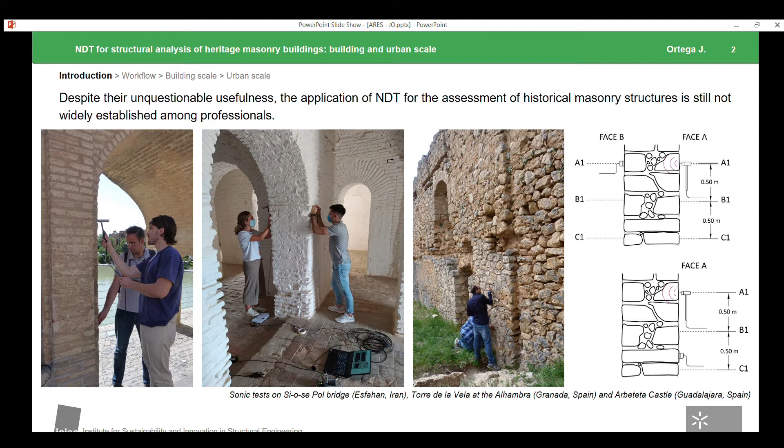And despite we can see a lot of works dealing with non-destructive techniques in the literature, in academic works, I believe their use is still not widespread among professionals. So we believe there is a necessity to create awareness about the usefulness and the great value that these techniques have when dealing with heritage structures, because in the end, this is the only way we can obtain and extract information from the structure without doing any damage to it.

For example, in this case, if we use georadar or GPR investigations, we can detect hidden information about the geometry or the construction of a monument. Or,

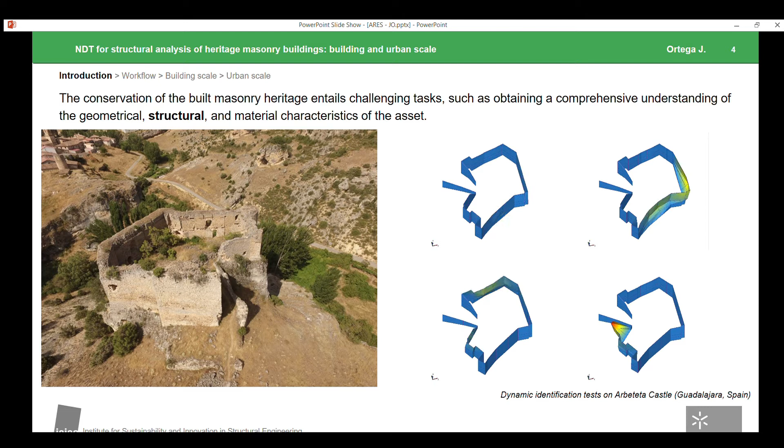for example, through dynamic identification test, we can have an initial understanding of the structural behavior of a building. Or as some of you already highlighted during this workshop, if we use flat jack or another kind of techniques, we can even get an approximation of an estimation of the material properties of the structure.

We know that flat jack is not really non-destructive, but the damage we do to the structure is really minor, and it's easily repairable. Moreover, there is another technique, as we can see later, like the sonic testing that we can also extract information from, and that one is completely non-destructive.

So the idea of this presentation is to show the common workflow that we used at the University of Minho. It's the workflow that we show to students in our masters. It's also the workflow that we do for the consultancy works that we do, and I will show you this workflow with some case studies that we have done in the past.

First of all, one thing that I think is important to highlight is that non-destructive techniques are always a complementary tool. So even though they can have value on their own, we should always do them alongside another set of tasks that will help us understand much better the results that we obtain with them. So in this particular case, as an illustration of what I mean,

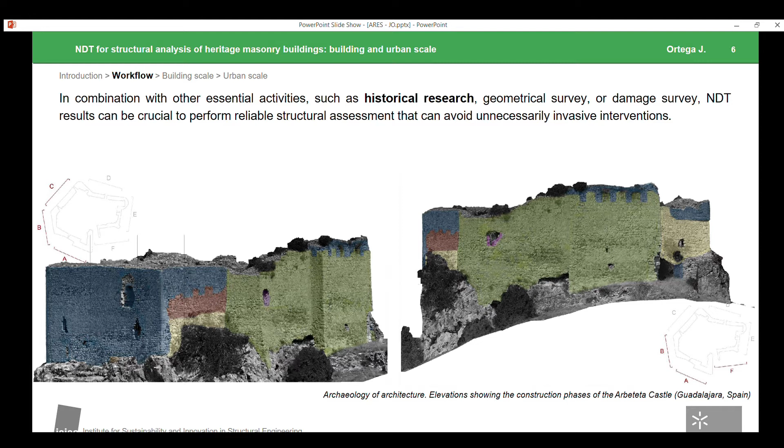before doing any non-destructive testing, we had available these detailed archaeological studies that allowed us to distinguish the different construction phases of the building, and even to determine some possible construction joints, because these parts of the walls were constructed at different eras.

At the end, these joints were structural, and when we did the dynamic identification test, we could figure out that these joints had an important influence on the structural behavior of this castle. Then when we prepared the numerical model and performed a modal analysis, we had to take into account these joints to simulate the real behavior properly.

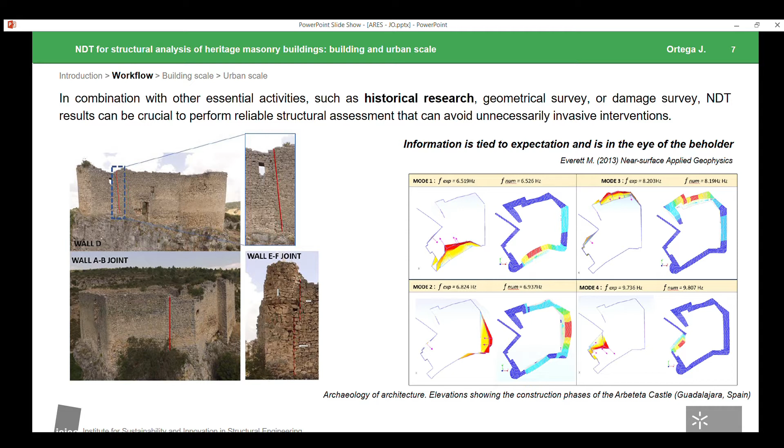If we didn't have these previous archaeological studies, this behavior would be much more difficult to replicate. And at the end, what we have is a numerical model that we know might represent the real behavior of the structure in a more reliable way.

Besides historical research, we also try to always perform detailed geometrical studies using photogrammetry, laser scan, or any other techniques that are available. In this case, for example, this is in the sanctuary of Santa Luzia in Portugal.

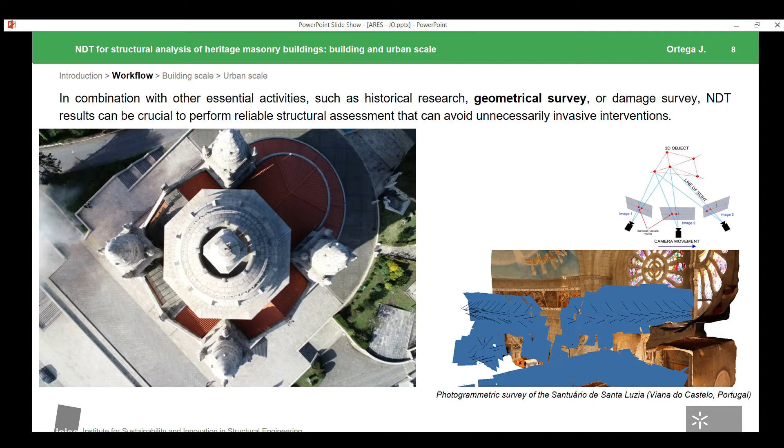So we also perform photogrammetry, an external photogrammetry using drone, and internal photogrammetry using our cameras. And at the end, what we get is a new set of plans and a detailed 3D model of the structure that gave us very important information,

either to create our 3D models, or we also get information that is more difficult to obtain, like accurate thickness of the different elements, and other very useful information that we need to obtain before we carry out any kind of structural analysis.

But anyway, as I was trying to explain before, this information can always be enhanced if we use some of the non-destructive techniques available. So, for example, when we did the photogrammetry, in the case of this dome, we only had information from the interior, so we could not know the thickness of this dome. So we can use other techniques that provide us this information, such as GPR.

In this case, it proved to be particularly useful because, in spite of what we were thinking, that it would be a stone masonry dome like the rest of the building, it was actually a very thin shell of less than 10 centimeters, and it was reinforced. So we found out that this dome was made of reinforced concrete.

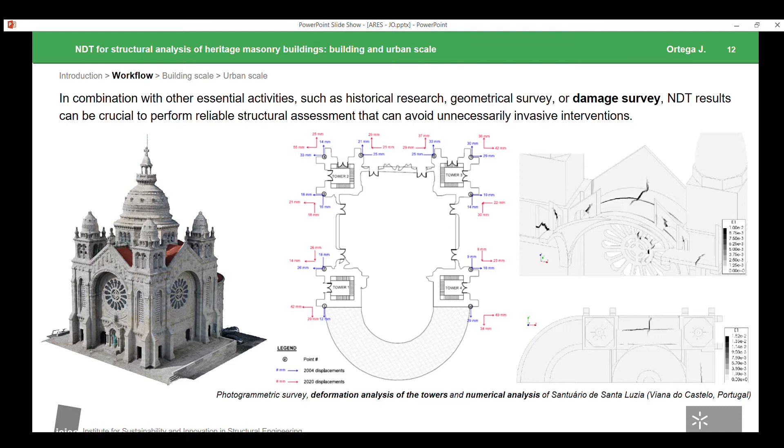I guess all these techniques fit each other. Ultimately, what we obtain is an accurate 3D model on which we can perform any kind of operation and analysis, such as studying the deformations of the towers, which was important for us, or performing a structural analysis, always knowing that what we are doing is reliable and represents well the real structure. This is, in essence, the essential workflow we try to follow in our work when we aim to do advanced structural analysis of heritage buildings.

We always try to do sonic tests, because this is a fast and direct tool to have a first estimation of the material properties, and it's completely non-destructive. We also try to always do a dynamic identification test to obtain a first estimation of the modes of vibration of the building, so we can calibrate our numerical models. These previous works really strengthen the confidence we have in our final numerical model, along with the historical survey, the detailed geometrical surveys, GPR, Impact Echo, or any other technique available.

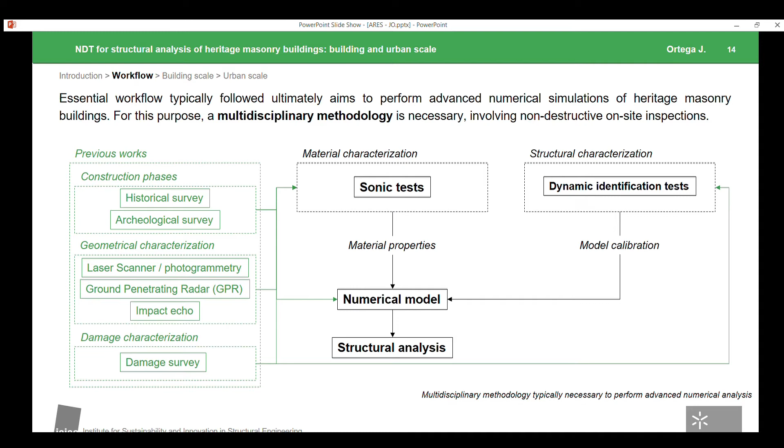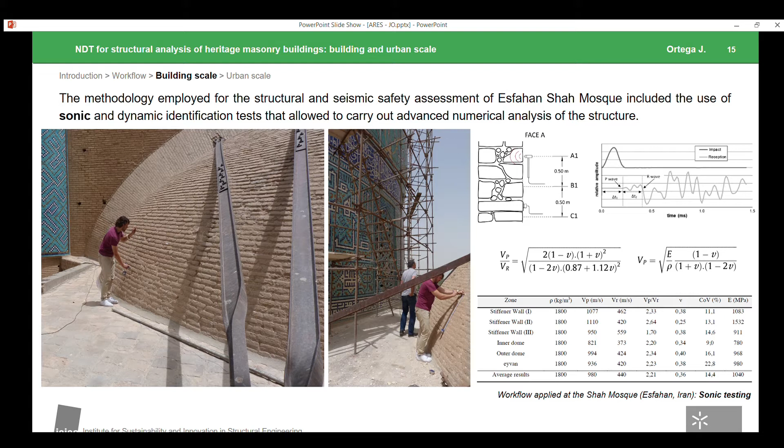First we did some sonic tests on all the structural elements, such as the domes and the walls of the mosque. For those of you not familiar, the physical principle of the test is that the velocity of the waves propagating through a material is directly correlated with the elastic material properties, such as the Young's modulus. So what we do is generate a wave, measure its traveling time, compute the velocity of the wave, and use it to estimate the Young's modulus. This gives us a first estimation of the Young's modulus of the brick masonry used in this structure.

Then we do the dynamic identification test. We put accelerometers in places where we believe they will be excited by ambient vibration, and then we can obtain the natural modes of the structure. Once we have this information, we can prepare our numerical model.

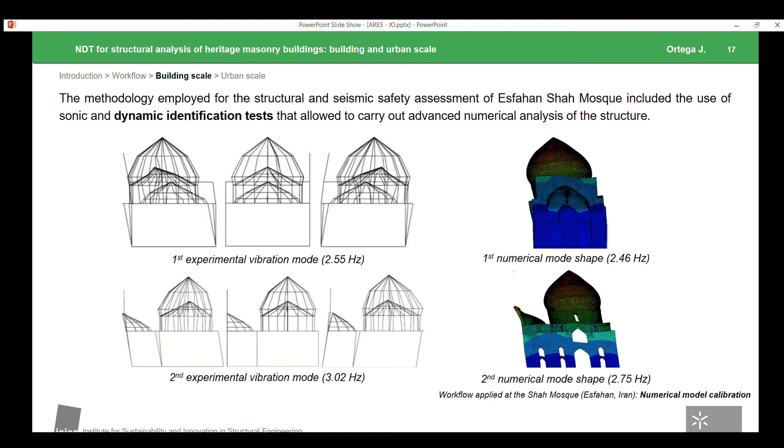The first input is the material properties obtained through the sonic test, and then we perform a modal analysis and try to compare if our numerical mode shapes correlate well with the experimental ones. If not, we do a calibration process, slightly updating the material properties and varying the boundary conditions until we obtain a good calibration. Then we can be more or less certain that our model simulates the real structure well, so we can proceed with the structural analysis.

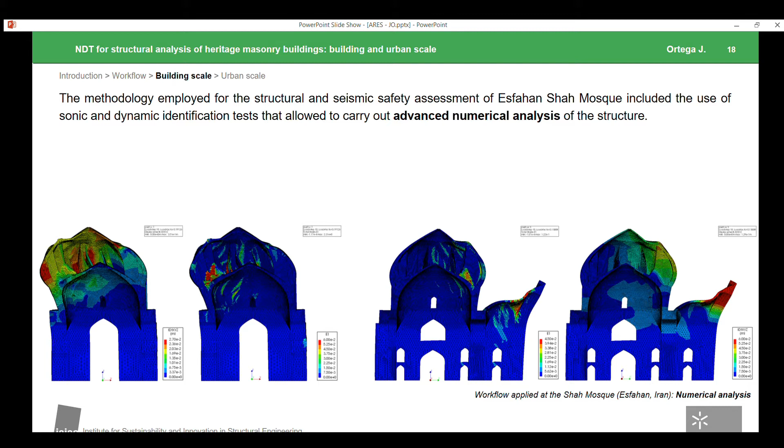Finally, I'd like to talk about how we can also use non-destructive testing at a different scale, for example when doing a large-scale seismic vulnerability assessment of an old historical city center. We believe non-destructive testing can be very helpful here too, especially when dealing with a typology that is recurrent, where we can find many examples of a similar typology within a given area.

So then we can perform this non-destructive testing, and essentially what we do is try to develop a probabilistic methodology that allows us to analytically derive seismic fragility functions that include uncertainty regarding different parameters, such as the material mechanical properties.

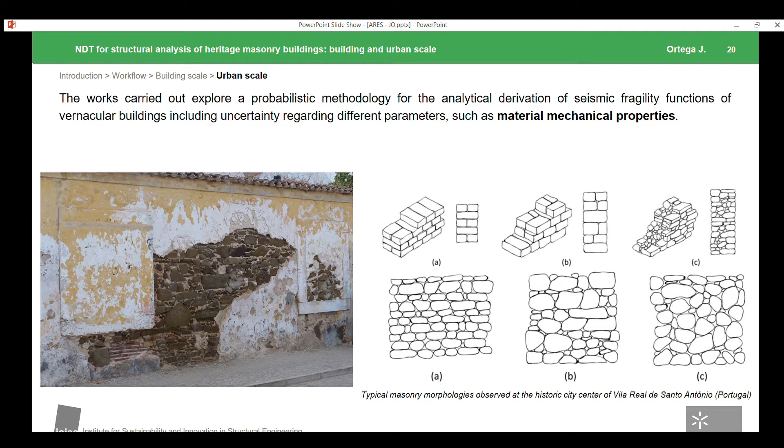When we try to do these probabilistic methodologies, what we need to define is a probabilistic distribution of the parameters selected. For example, if we want to study material properties, we need to find the most adequate probabilistic distribution. There are some codes, such as this Italian guide, that give us a prior probabilistic distribution for the different material parameters according to the masonry typology.

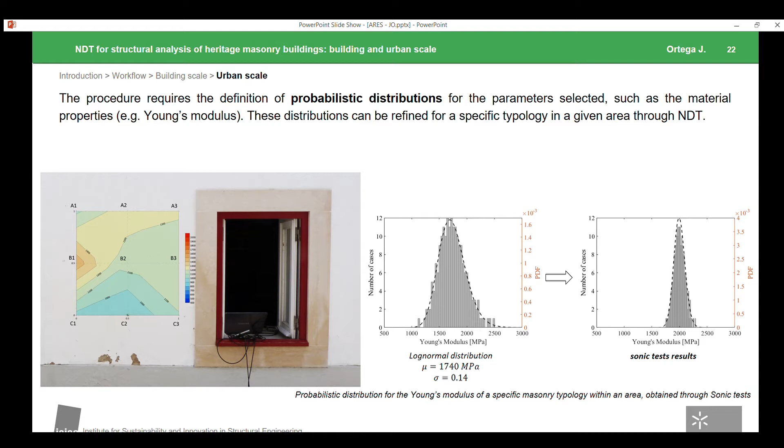But if we are able to perform some non-destructive testing, for example, that provides an estimation of the Young's modulus, and we perform it in several cases within a city center of the same typology, then maybe we can obtain a much more specific probabilistic distribution that better represents the masonry typology of that specific area.

Once we have this probabilistic distribution that represents well the masonry of the area we are studying, we can perform numerical finite element analysis to evaluate the seismic capacity of buildings according to the variation of different selected parameters, such as material properties or other construction parameters, for example the lack or presence of a diaphragm.

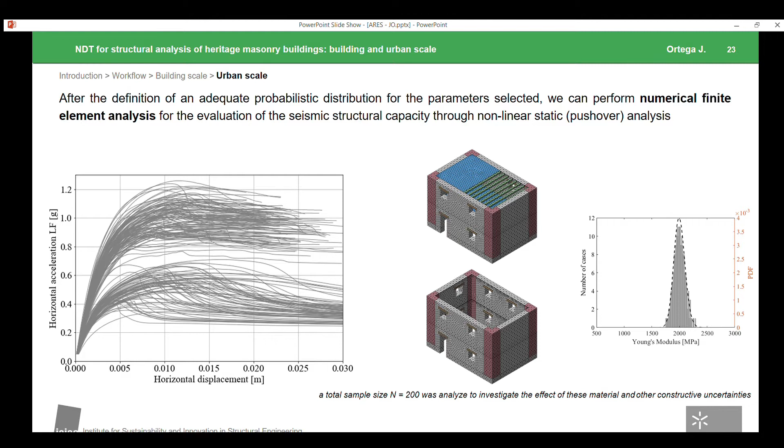As a result, we can construct fragility curves for a given construction typology that take into account the uncertainty of these material and constructive parameters, which were refined and investigated with the use of non-destructive tests.

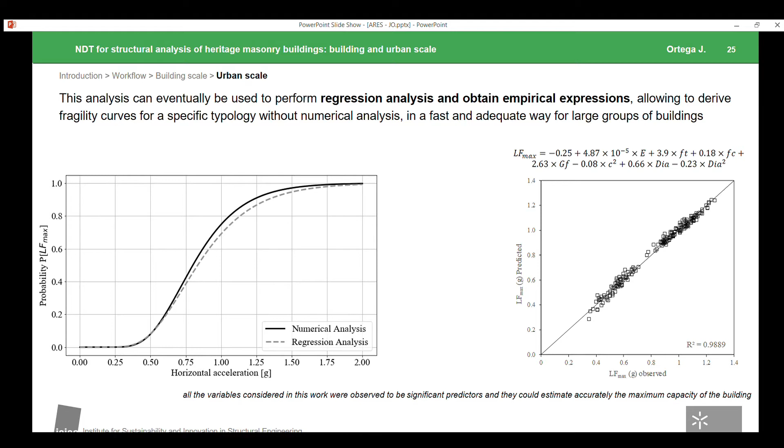Eventually, with this kind of approach we can perform regression analysis and obtain empirical expressions which allow us to derive these fragility curves for a given typology without numerical analysis. This is an easy and fast way to do it for large groups of buildings, since numerical analysis is a more demanding and time-consuming tool.

But well, this is more or less what I wanted to discuss. I hope I could give a quick glimpse of how we use non-destructive techniques in our group at the university, and show how vital and fundamental they are for all our work. So thank you for your attention.

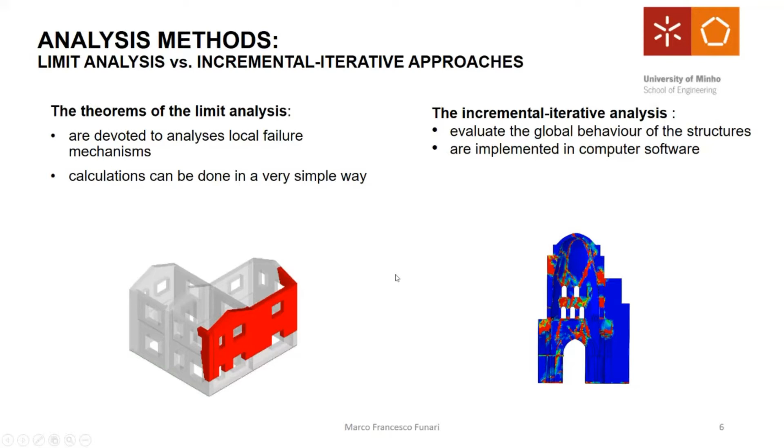But the question now is, what do we have to use? The choice, to be honest, depends on several factors, like the cost, the time, and also the knowledge level that we have about the investigated structure. We also have to say that neglecting the global behavior and focusing just on the local failure mechanism could bring erroneous evaluation of the seismic performance of the structure.

To this end, I developed this kind of two-step analysis. As you can see, it is based on two main phases. We have the blue blocks, which aim to assess the global behavior of the structure by performing just a pushover analysis. Then we have the orange box, which is all integrated in a visual programming environment, in particular in Grasshopper for Rhino 3D, which aims to perform local analysis by combining both the theorem of plasticity, in particular the upper bound theorem of plasticity, and an evolutionary solver. In particular, I used genetic algorithm.

As you can see, the link between these two phases is the construction of this kind of control surface, which allows us to coarsely identify the macro block geometry that is going to collapse for that loading condition.

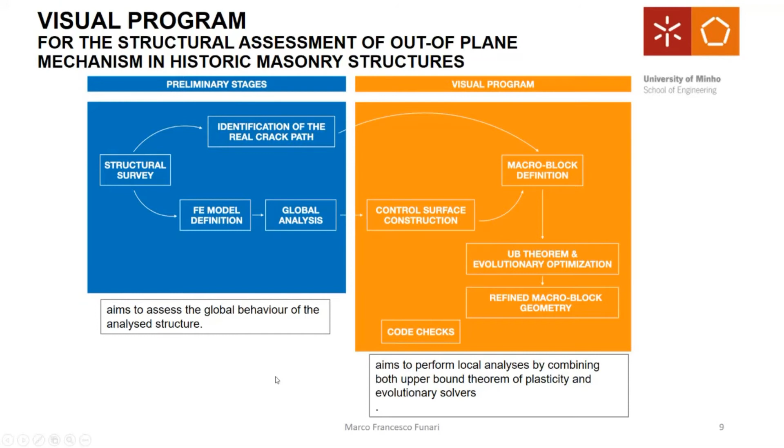What is the control surface? As you know, the pushover method is very sensitive to the choice of the control point. To overcome this problem, I consider several control points on the top of the structure, as you can see in this picture. The control surface is generated by interpolating a surface through the point cloud.

The point cloud has as x and y coordinates the same coordinates of the control points, whereas the z coordinate is directly proportional to the horizontal displacement occurred during the step-by-step global analysis.

This just means that when we have zero horizontal force and of course also zero horizontal displacement, the control surface is basically flat. Whereas in this picture, I'm reporting a control surface where the structure is very close to the collapse time.

I hope it's quite intuitive that the regions of the control surface which present a higher value in terms of slope are those in which the plasticity is concentrated. So the control surface allows the script to identify the weak region of the structure and then to introduce the failure surfaces in order to start the local analysis of the failure mechanism.

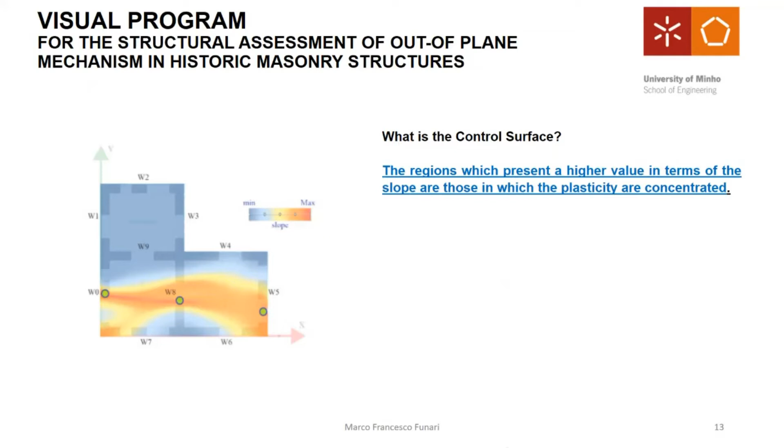About the second part of the proposed procedure, it is all integrated in Grasshopper for Rhino. It is clustered, as you can see, into several groups, which are tasked to perform specific operations.

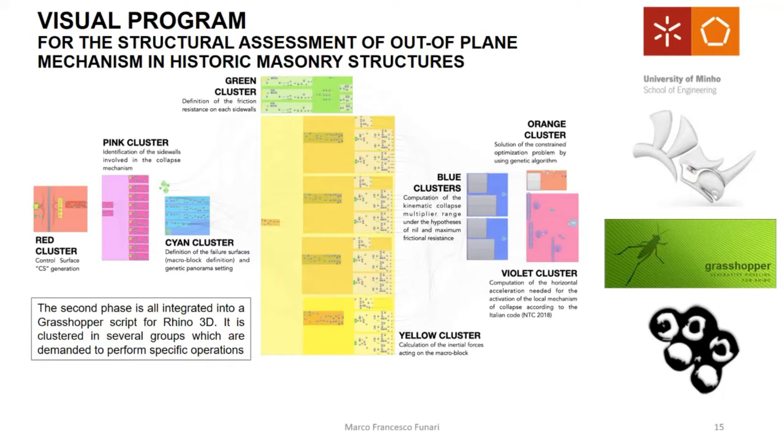Let's start. The first group is the red cluster, which is tasked with defining the control surface generation, just by using the data arising from the global pushover analysis.

Then we have the second cluster, which aims to identify the sidewalls involved in the collapse mechanism. Then we have to define the failure surfaces, which generate the definition of the macro blocks.

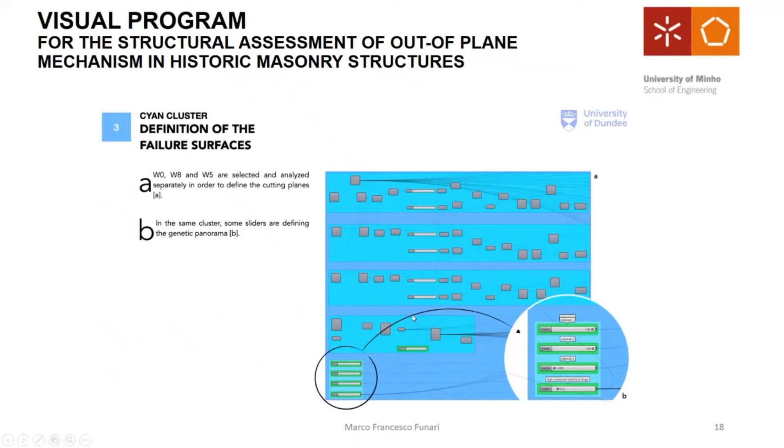As you can see in this cluster, we have some sliders which are able to define the genetic panorama, and they represent the variables of our optimization problem that will be performed with the genetic algorithm. Then we have the fourth cluster, which allows us to define the frictional resistance of the sidewalls.

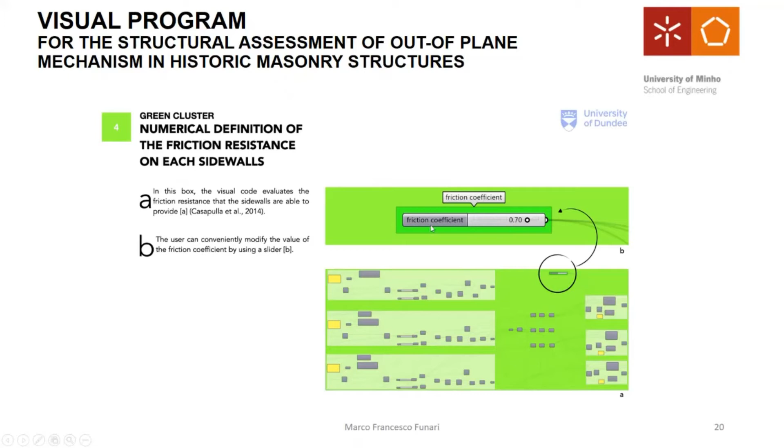As you can see in this framework, the user can also change the friction coefficient and other parameters for the optimization problem. The yellow cluster is devoted to computing the inertial forces, which are very important in order to define the equation of the principle of virtual works that allows us to compute the kinematic collapse multiplier.

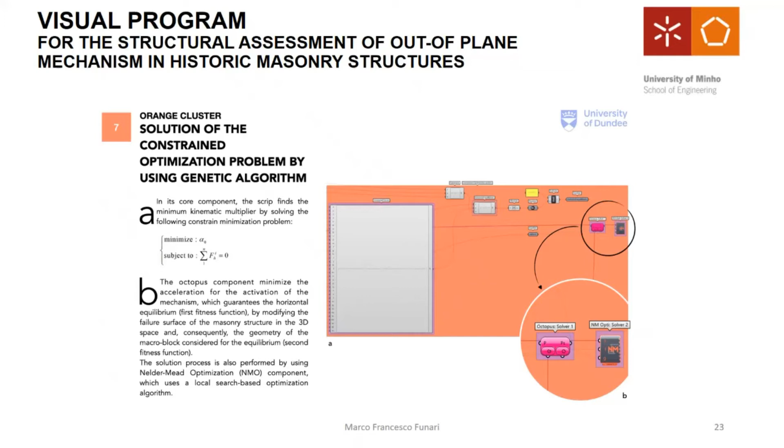This orange box is the box tasked with optimizing the problem to find the minimum load multiplier and to find, of course, also the horizontal acceleration needed for the activation of the local mechanism.

Based on the result arising from this global analysis, we can construct the control surface, which allows us to define the macro block geometry. And then, thanks to the genetic algorithm, we can optimize to minimize the value of the load multiplier and find the minimum load multiplier according to the upper bound limit theorem.

Since a couple of months, I'm also working in collaboration with Dr. Mehrotra from University of Minho, my same university. We are trying to implement my method of analysis with her tools for rocking dynamic analysis. Basically, starting from the geometry and also from some mechanical data, this script is able to define the geometry of the macro blocks using the procedure I described before. The second part of the script is able to compute the kinematic constants, write the equation of motion, and provide a representative time history of the structure.

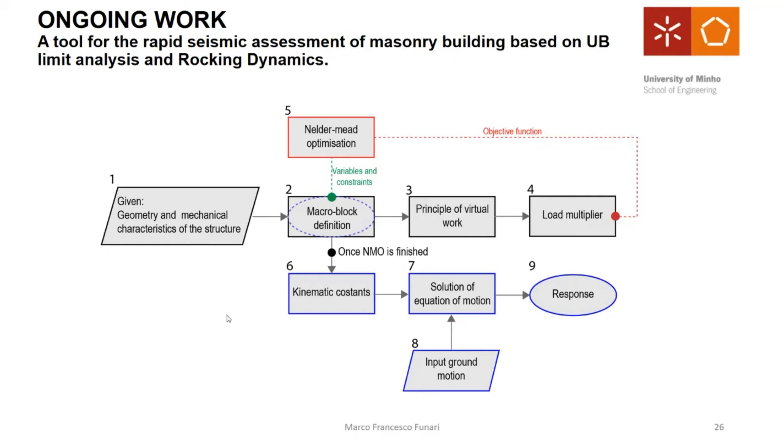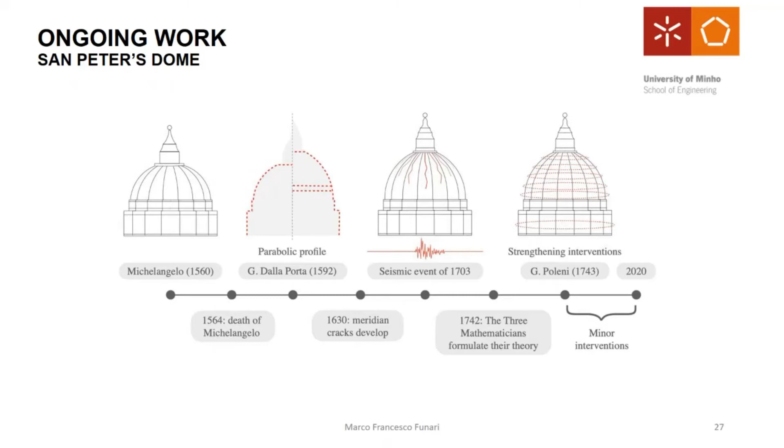Another ongoing work is the definition of a grasshopper script for the computation of the horizontal thrust of masonry domes. This work is in collaboration with Dr. Luis Carlos Silva, Professor Paulo Lourenço, Daniel Oliveira, and Lamu Musavian from the University of Naples. To do that, we chose to investigate one of the most critical cupolas in the world, the St. Peter's dome, designed by Michelangelo and Giacomo della Porta. Masonry domes tend to generate meridian cracks, so the structural behavior of this kind of historical dome is that of a pushing dome, so we can study just a slice of the cupola.

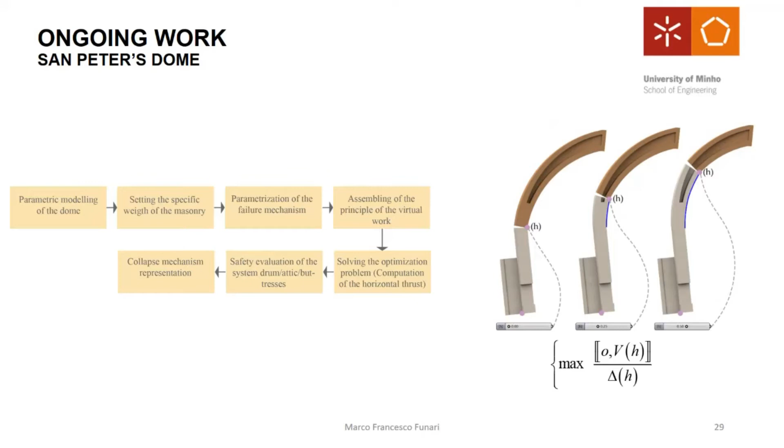In this slide, I'm representing the flowchart of the proposed script. First, we can parametrically model the geometry of the dome. Then we set the specific weight in order to compute the inertial force. Then we define the parametrization of the failure mechanism, introducing, according to the upper bound limit analysis, a cylindrical hinge which generates the collapse of the structure. Then we can assemble the principle of virtual works and solve it with an optimization tool. In this case, I used Octopus, which is based on genetic algorithms.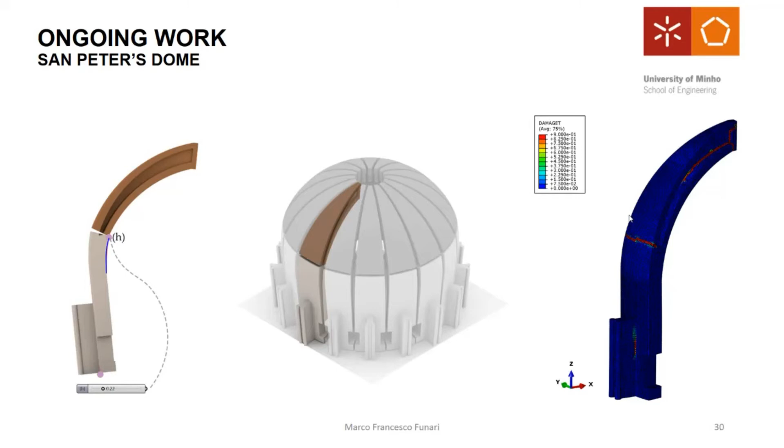This is one of the preliminary results of this procedure. We are also trying to validate it with finite element analysis using a concrete damaged plasticity model available in Abaqus. The results obtained using the grasshopper tool, which defines the horizontal thrust and failure mechanism in no time, just 5 seconds, are in perfect agreement with the results obtained in terms of damage pattern from the finite element analysis.

Some conclusions: I explained this novel digital procedure for the assessment of masonry structures. Genetic algorithms are employed to explore different kinds of collapse mechanisms, and we are also trying to apply this approach to different structural typologies, like domes. The proposed visual script has been developed using grasshopper components, but we are working to develop a single component program in C#, to make this procedure as user-friendly as possible. Our idea is also to share these components freely with other scholars and students, because I don't think our research makes sense if we cannot share it freely with other people.

Thank you very much, Mislav. Thank you very much for this nice opportunity. Marco, thank you very much for your very interesting presentation. I'm really satisfied with the things you're doing and presenting, and I hope you will continue in this good direction and present new results very soon. Thank you once again for the really nice presentation.

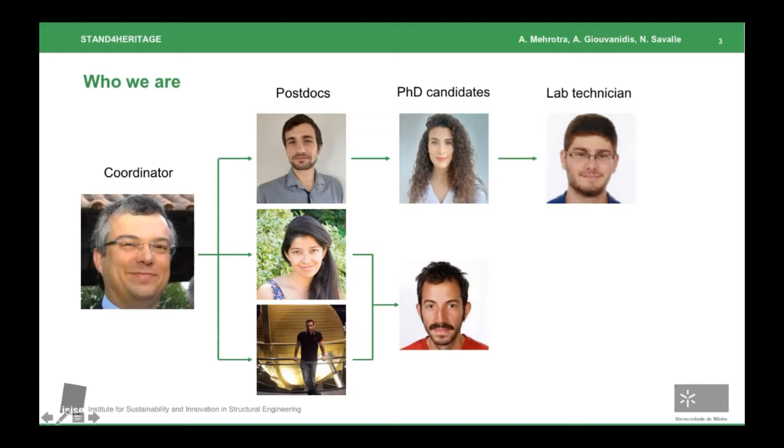Through STAND4HERITAGE, we are all working towards introducing formal standards for safeguarding built cultural heritage. Heritage buildings are intrinsically very diverse and complex, and are often subjected to earthquake-related threats such as out-of-plane damage to masonry walls, which is acknowledged as the main cause for loss of artistic assets and injuries to people both inside and outside buildings.

But first, what is masonry? As you can see, it's a composite material typically made up of bricks, stones, or adobe, and it can either be mortared or dry stacked. It is a very old material, represented almost everywhere, and makes up a substantial part of our built cultural heritage.

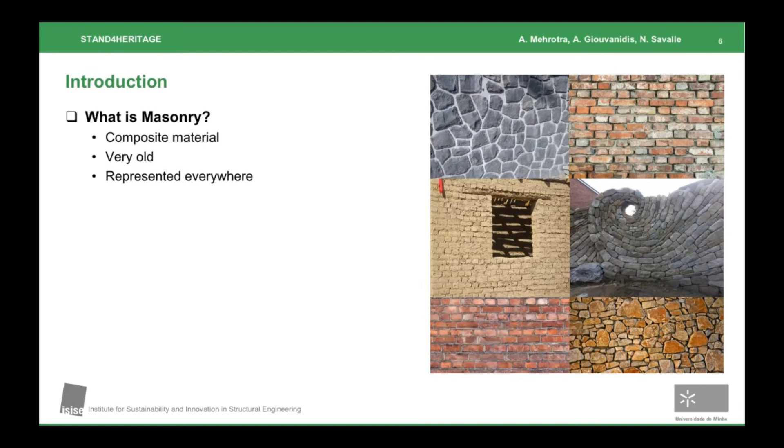Conservation of this cultural heritage is both part of our societal legacy as well as an important economic issue. In fact, in Europe alone, tourism to visit the many monuments and historical centers accounts for 10% of GDP and 12% of employment.

Additionally, masonry represents 50% of the world building stock, and often older masonry structures need maintenance due to cracking, spalling, weathering, settlements, or other causes of damage.

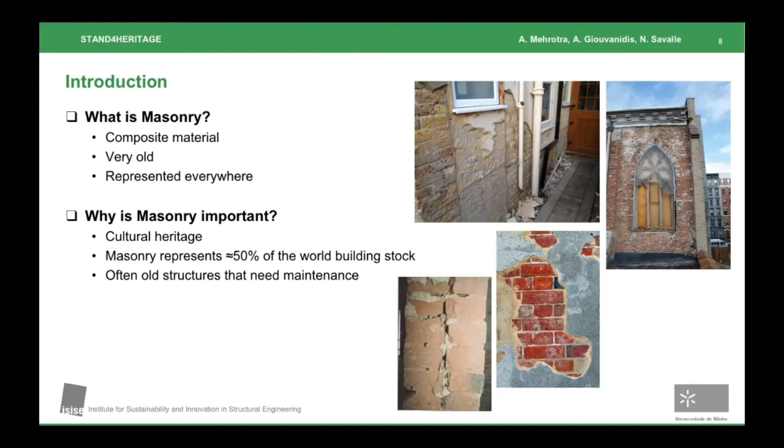Furthermore, masonry structures have traditionally only been designed for gravity loads. However, during earthquakes, brittle out-of-plane failure of masonry walls is a very commonly observed phenomenon. This is particularly relevant and necessary to address in several earthquake-prone countries in Europe, such as Italy, Croatia, Greece, Turkey, and Romania.

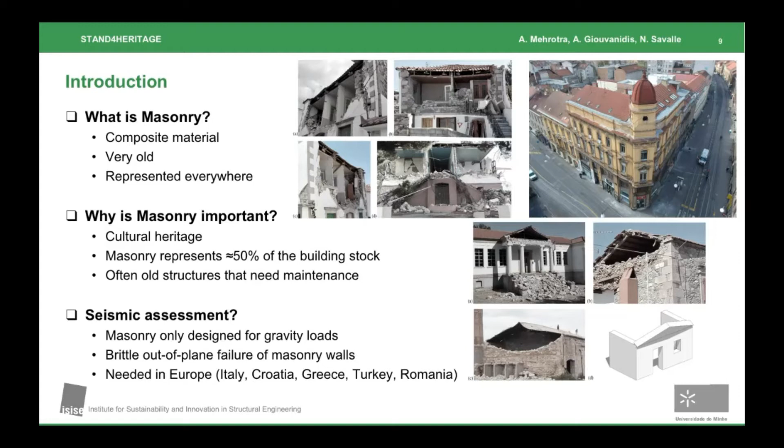There is thus a need to control out-of-plane displacements of masonry walls, the assessment of which is done using either simplified pushover analyses or more advanced numerical modeling simulations.

However, this involves several challenges, as demonstrated by a recent blind prediction exercise whereby several international experts were invited to predict the seismic capacity of two U-shaped masonry specimens that were tested on a shaking table. The specimens comprised a more regularly arranged brick house and a more irregular stone house. 18 predictions were provided by the experts using different modeling approaches, and an enormous scatter was observed in the results, with a very strong deviation from the experimental response.

This scatter was linked in part to the numerical parameters assumed for these simulations, which was found to strongly influence the predictions. There is thus a need for integrated stochastic-based seismic modeling of these structures to better account for these uncertainties. STAND4HERITAGE addresses this need through 4 interwoven work packages.

The first work package focuses on the characterization of the seismic signal, with the objective of identifying the ground motion characteristics most critical to the out-of-plane behavior of masonry walls. Specifically, given the shortage of real or historic earthquakes that exist, this work package uses stochastic analysis to create a huge database of seismic signals and to investigate their influence on out-of-plane behavior.

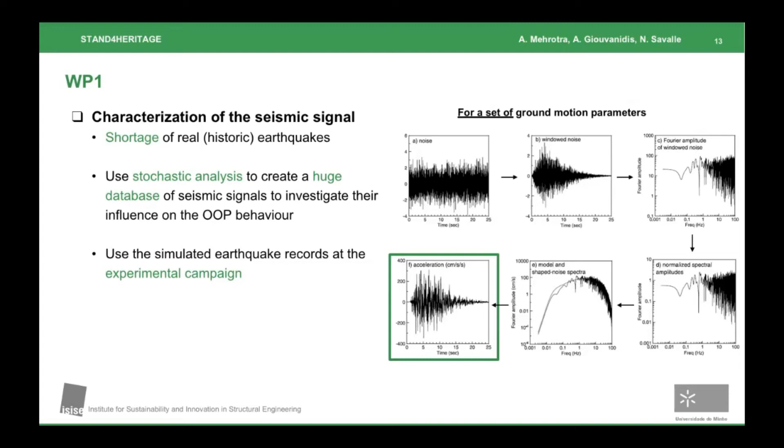These simulated earthquake records will then be used in an extensive experimental campaign, which brings us to our second work package, whereby tests will be conducted on rocking blocks, rocking masonry walls representative of facades, and U-shaped masonry wall assemblies. Specifically, tilting tests will be conducted to identify failure mechanisms, while varying parameters such as geometry, material properties, the presence and location of openings, as well as the quality of the connections to the transverse walls.

Additionally, an extensive number of shake table tests will also be conducted to study the effect of the seismic input. The specimens to be tested include single and multiple rocking blocks, as well as U-shaped masonry walls. Furthermore, a 6-camera digital image correlation, or DIC, system will be used to monitor the displacements of these structures.

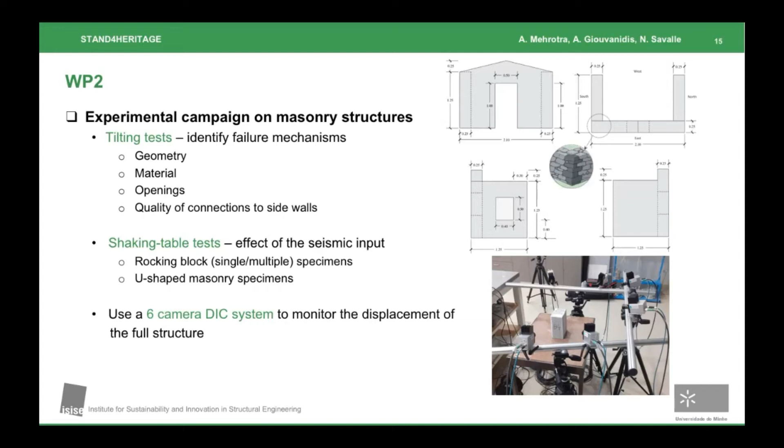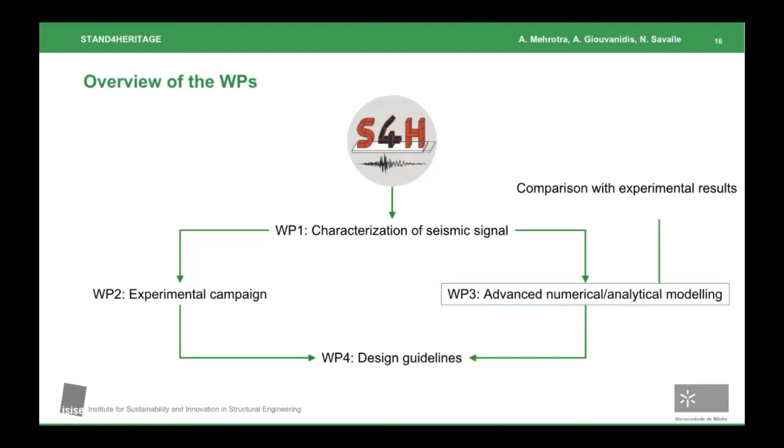In parallel, the third work package is devoted to advanced numerical and analytical modeling, with the results of these simulations being compared with the experimental tests. More specifically, rocking dynamics is used in MATLAB to formulate new analytical models to simulate the behavior of more complex masonry structures. Simultaneously, numerical finite element and discrete element models are being developed in both Abaqus and 3DEC to better account for energy dissipation of the rocking structures at impact and to accurately reproduce the whole response history and model mechanism evolution over time.

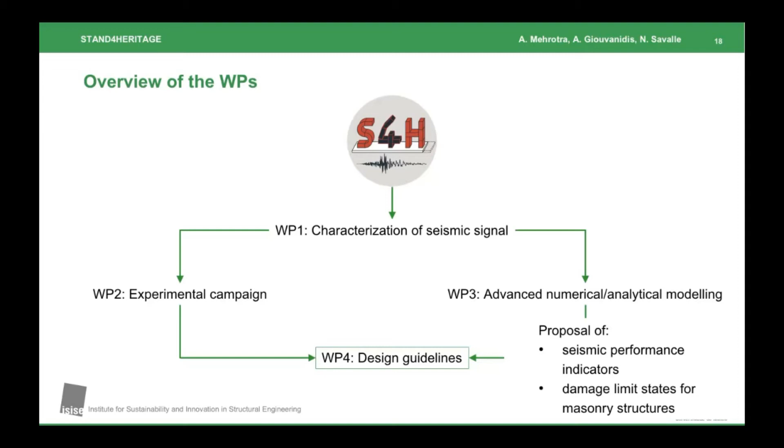Finally, based on the results of the first three work packages, Work Package 4 provides guidelines for the design and assessment of masonry structures through the proposal of new seismic performance indicators and damage limit states. More specifically, this comprises the definition of performance indicators suitable for masonry structures, the formulation of damage limit states and fragility curves, the proposal of repair cost ratios for damaged components of masonry structures, and finally the integration of results into analytical and simplified tools for engineering practice.

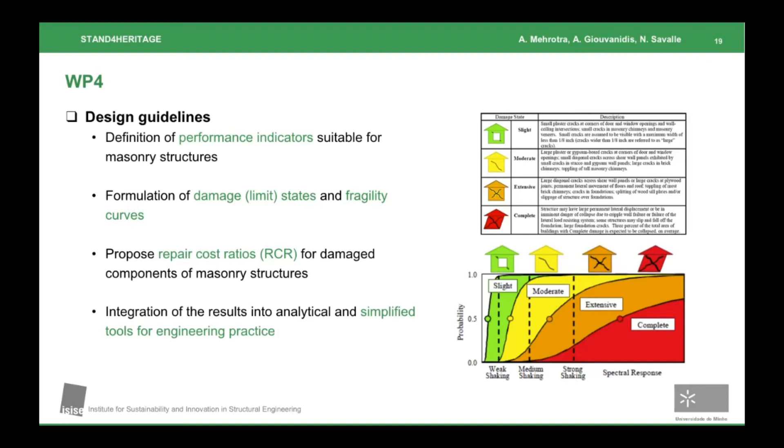Over the past few months, our team has conducted both static and dynamic analyses of different masonry structures. From a static perspective, the team has focused on the design of tilting test equipment. The objective here is to experimentally identify different failure modes of masonry structures through the variation of parameters such as specimen geometry, presence of openings, materials, and connectivity to transverse walls.

Additionally, numerical modeling in DEM is also used to get an initial estimate of failure modes of different structural geometries, as well as the tilting angle required to cause collapse. Numerical modeling in both FEM and DEM is also used to model tilting tests from the literature, with the objective of also benchmarking the different modeling procedures.

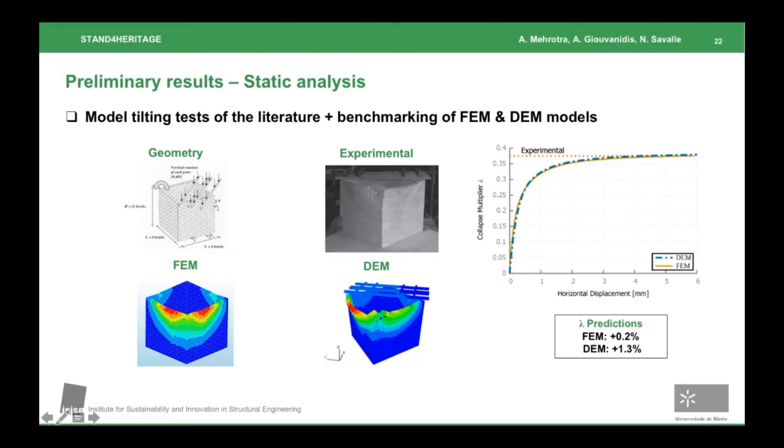In terms of dynamic analyses, free rocking experiments were recently carried out in the lab using 5 blocks with dimensions of 20 by 10 by 5 centimeters. 20 tests, or 10 for each side, were conducted for each of the 5 rocking blocks. DIC analysis was then used to measure the energy dissipation and rocking amplitude with a high level of precision, while dynamic identification was used to measure the natural frequency and consequently to compute the interface stiffness.

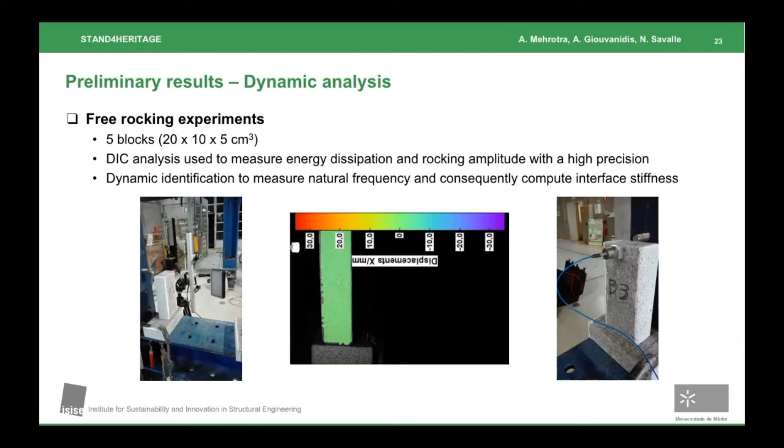From a numerical perspective, the team has focused on reproducing this free rocking response using experimental results from the literature. The dynamic response of rocking blocks with varying aspect ratios was simulated in Abaqus, while an investigation was also conducted into the effect of damping. In addition to free rocking, the blocks were also analyzed for the forced rocking response, and the two sets of results were found to compare remarkably well.

Moving forward, the team will focus on the identification of ground motion parameters that are most critical to the out-of-plane behavior of these structures, as well as shaking table tests, where we move from single block rocking to multiple block rocking, and finally test U-shaped masonry structures. We will also work on the formulation of advanced numerical models to capture the nonlinear dynamic response of more complex mechanisms.

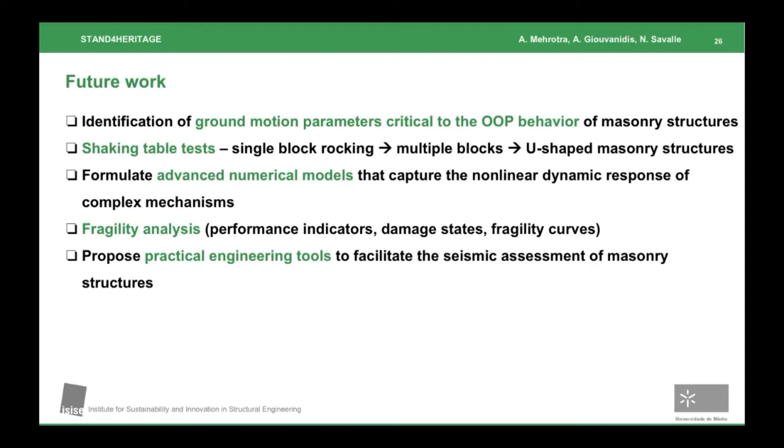As well as conduct a bunch of fragility analyses with the objective of providing new performance indicators, damage limit states, as well as fragility curves. And finally, we will propose practical engineering tools to facilitate the seismic assessment of masonry structures.

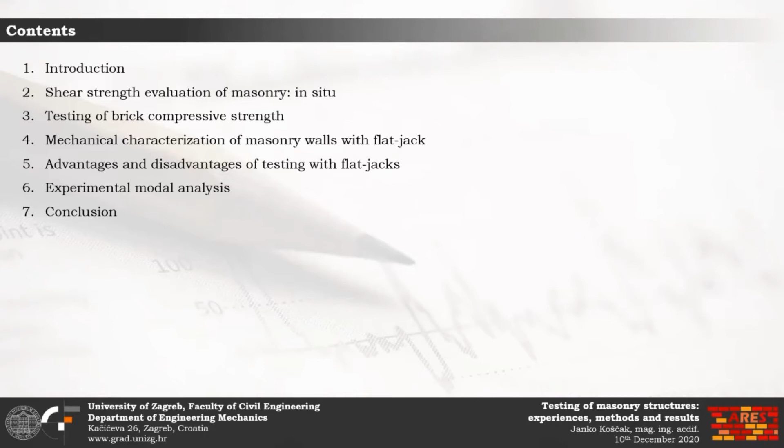This year Zagreb was hit by a relatively strong earthquake and a significant number of buildings were damaged, most of which are masonry structures. Causes can include structural non-maintenance, previously accumulated damage, and harmful interventions into load-bearing elements. However, it is also a fact that these old masonry buildings were not designed to withstand such an earthquake intact.

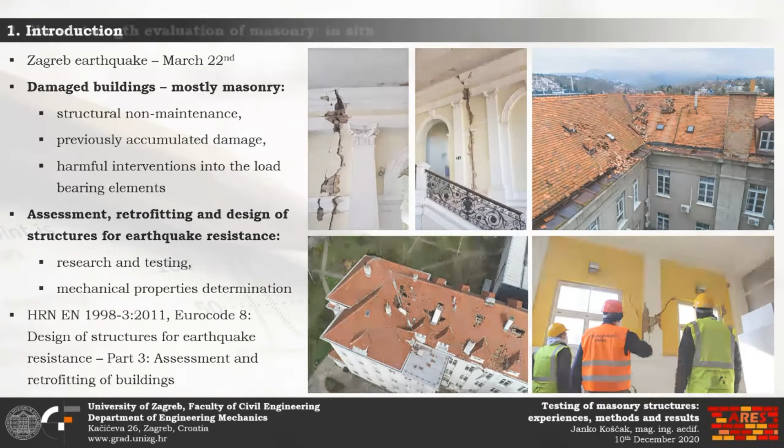In order to assess, retrofit and design such structures to be earthquake resistant, at least according to Eurocode 8, mechanical properties should be determined as accurately as possible through research and testing. On this slide, the determination of the in situ shear strength of masonry is shown, and before testing, the plaster and mortar from the load-bearing wall should be removed.

The test is performed on the longitudinally oriented brick as shown in the figure, and the joints with some additional space on both sides of the tested brick should be cleared for insertion of the hydraulic jack. This also ensures the brick is not restrained on the opposite side of the jack, and brick translation during the test can be measured with an LVDT sensor.

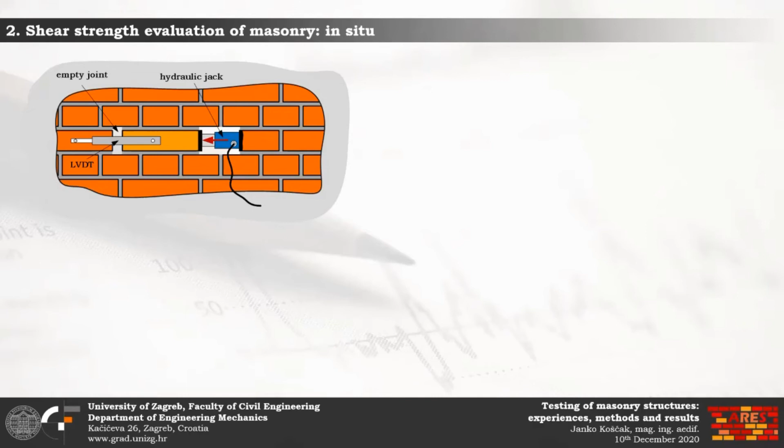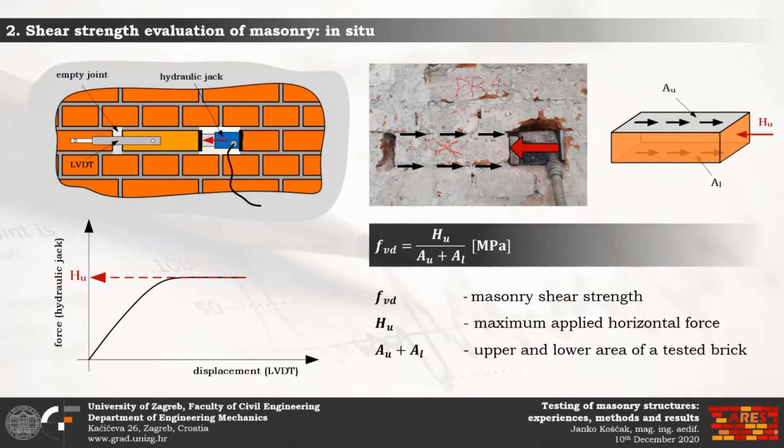Pressure of the hydraulic jack should be increased until the maximum value of force is attained. The brick then slides along its horizontal joints without pressure growth. The masonry shear strength, FVD, can be calculated by dividing the maximum applied horizontal force measured, HU, by the sum of upper and lower area of the tested brick. It's important to note that this value takes into account the presence of vertical load.

Because of the existing vertical force within a tested wall, some normal compressive stress acts on the tested brick, and in combination with the friction coefficient, it increases the value of masonry shear strength. This can be seen from the expression.

A value more useful in design is the joint shear strength without the influence of vertical load, FVM0. Even with the simple shear test, this value can be assessed if the friction coefficient is taken from literature and normal compressive stress is taken from a numerical model of the building. A better estimate of masonry shear strength could be obtained through experimental determination of these parameters using flat jacks.

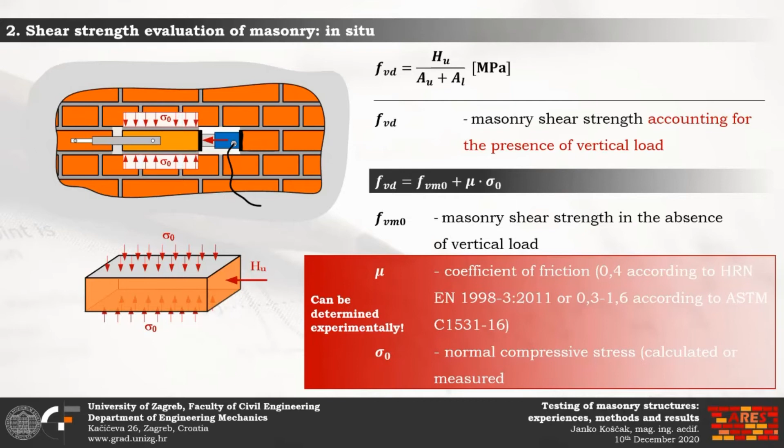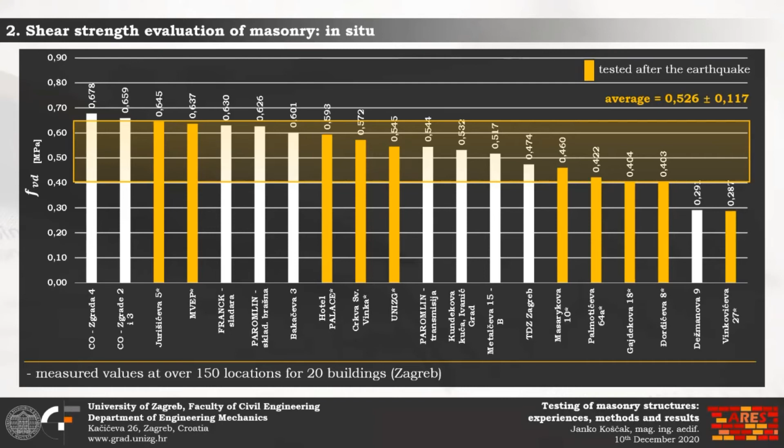This slide shows the average test results of shear strength measurement for 20 different masonry buildings in Zagreb, measured at over 150 locations. Each bar on the chart represents the average value of all measurements taken within the building labeled below, and yellow bars represent the measurements performed after the recent earthquake. The global average value of all tested buildings is 0.53 megapascals.

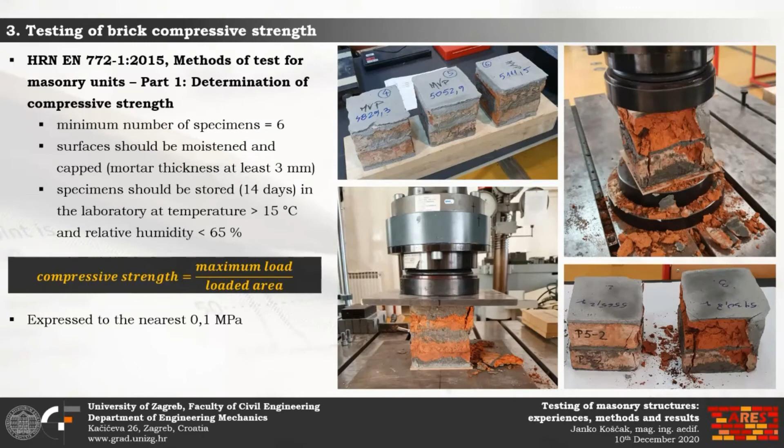Testing of brick compressive strength is shown next. In the laboratory, we performed this test according to the European standard methods of test for masonry units. According to the standard, a minimum number of tested specimens should be 6. The surfaces should be moistened and capped with mortar at least 3mm thick, and specimens should be stored for at least 14 days in a controlled environment. The compressive strength is then calculated as the maximum load applied over the loaded area, expressed to the nearest 0.1 megapascal.

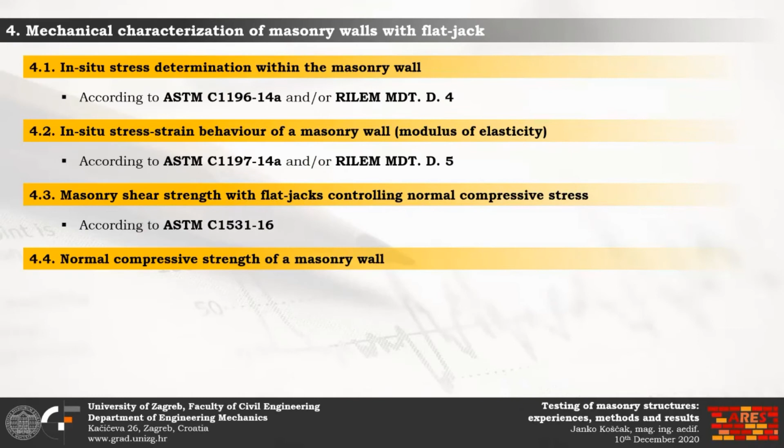The summarized test procedure for various mechanical properties that can be obtained with the flat jacks is shown next. Firstly, in situ stress determination within the masonry is described here.

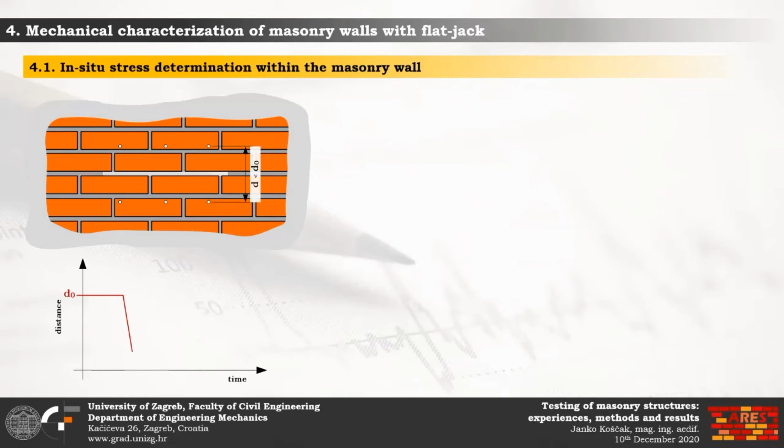Now the initial measurement at D0 can be performed. After the initial measurement, the cutting of the flat jack slot is conducted, and this procedure releases the normal pressure between the reference points, so the distance between them is reduced.

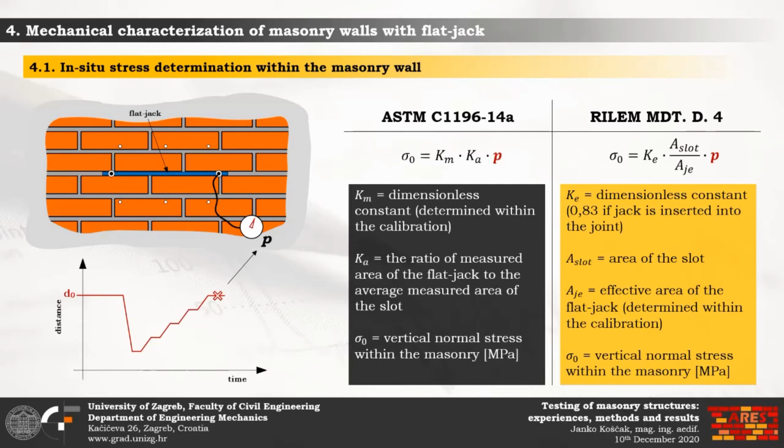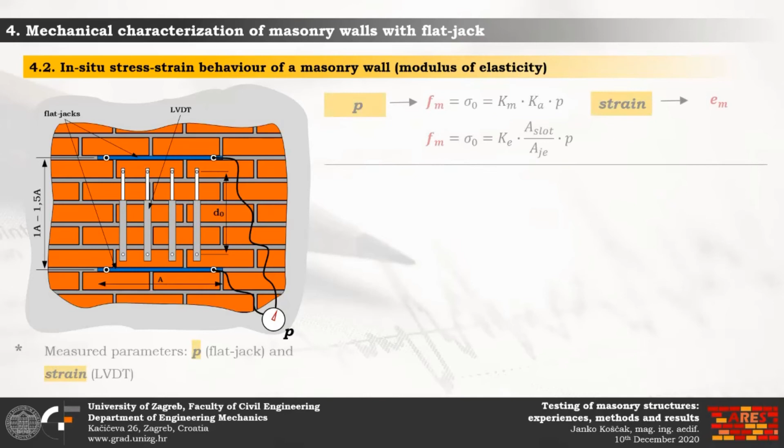Secondly, LVDT sensors for continuous strain measurement are placed vertically between the flat jacks. Now different levels of pressure should be applied in increments, and the pressure of each increment should be held for about 1 minute. At each increment, strains and pressure are measured, and the normal vertical stress is calculated. Finally, the tangent and secant modulus of elasticity can be determined by dividing the value of stress by the corresponding strain value.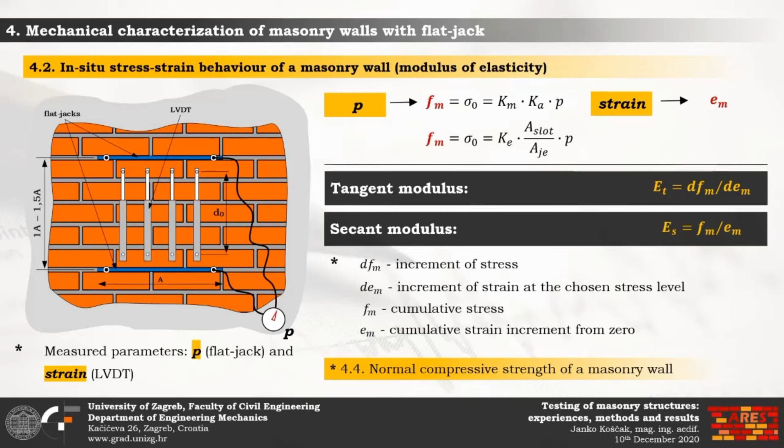The next slide describes the procedure for determining masonry shear strength with flat jacks controlling normal compressive stress. The setup of the flat jacks is identical to the previously shown setup, but here the hydraulic pump and LVDT sensor are inserted between the flat jacks as shown in the figure. Again, this test setup for the simple shear test is the same as previously described within the simple shear test.

It's explained before that masonry shear strength accounting for the presence of vertical load can be easily determined. However, our goal here is to determine masonry shear strength without the influence of vertical load, that is the joint shear strength, FV0.

To do that, we can apply multiple levels of pressure with a flat jack, for example from P1 to P3. For each level of applied pressure, shear tests should be conducted, and the maximum horizontal forces Hu1 to Hu3 should be taken. Now it's possible to calculate the masonry shear strength for each pressure level, FVD1 to 3.

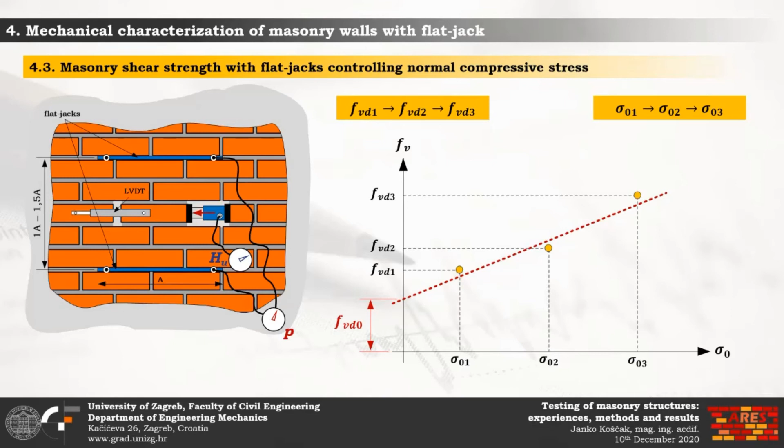Also for each level of pressure, normal vertical stresses should be calculated. We can plot the values of FVD on a vertical axis against the values of normal pressure on the horizontal axis, and the best fit straight line is plotted through the given points. This is the red line on the figure. At the intersection of this line with the vertical axis, this represents the pure joint shear strength at zero normal compressive stress, FVD0. Finally, it's clear from the figure that the inclination of the best fit line represents the friction coefficient.

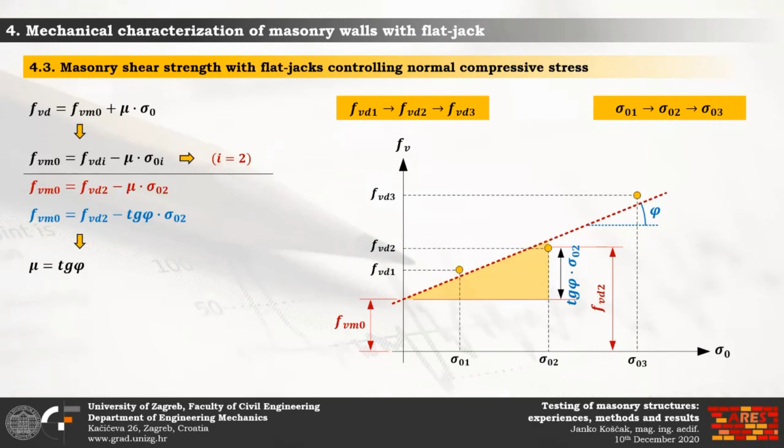Lastly, regarding the flat jack, I want to mention some advantages and drawbacks of such tests. Regarding the disadvantages, it's sometimes hard to find an adequate place for testing due to local irregularities of masonry. Slots for inserting the flat jack are often cut with eccentric saws using water, and that procedure saturates the mortar, which is bad. Further, the uneven thickness of the flat jack slot can significantly affect the applied stress distribution.

However, despite the mentioned drawbacks, valuable data can be gathered with such tests. Prior to the retrofitting of earthquake damaged buildings, it would be essential to make a number of such tests on rationally selected masonry buildings. The invested funds into the testing would be refunded through savings on renovation costs, as structural designers would enter the calculation with more realistic values of material properties.

The last thing I want to show you is some test results regarding the dynamic parameters that we measured over the past few years within the earthquake rehabilitation study, in partnership with the city of Zagreb. Apart from the mechanical properties of material, dynamic parameters such as natural frequencies, mode shapes, and damping ratios can be of vital importance during the process of validation and calibration of a numerical model, which is used in structural design.

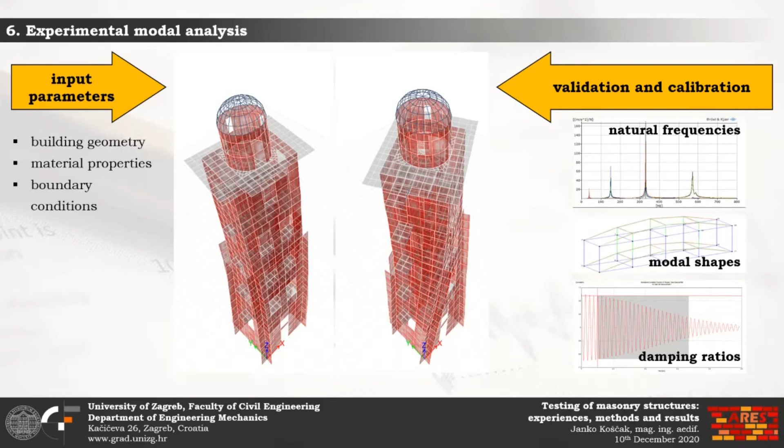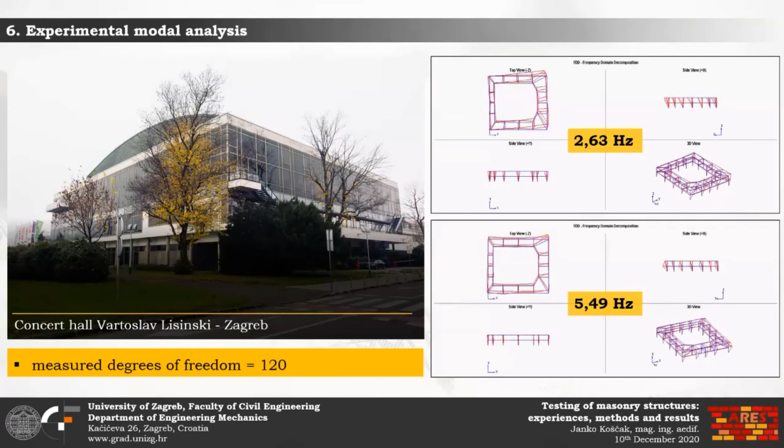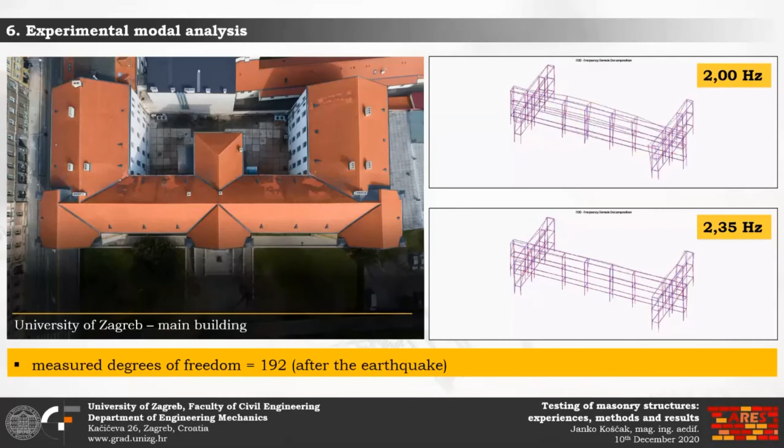We're almost done, so finally I'll state some conclusions on the last slide. Firstly, the test results obtained by testing of masonry structures allow designers to use more accurate input parameters within the calculation. Secondly, the results obtained by a simple shear test represent very useful information to the structural designer about the condition of the masonry.

Third, the test methods with flat jacks provide the determination of valuable data on compressive stress, coefficients of friction, and stress-strain relations of masonry. Then, the systematic conduct of such tests would allow the establishment of a database that could be used for other similar buildings, and that would ultimately reduce the retrofitting costs.

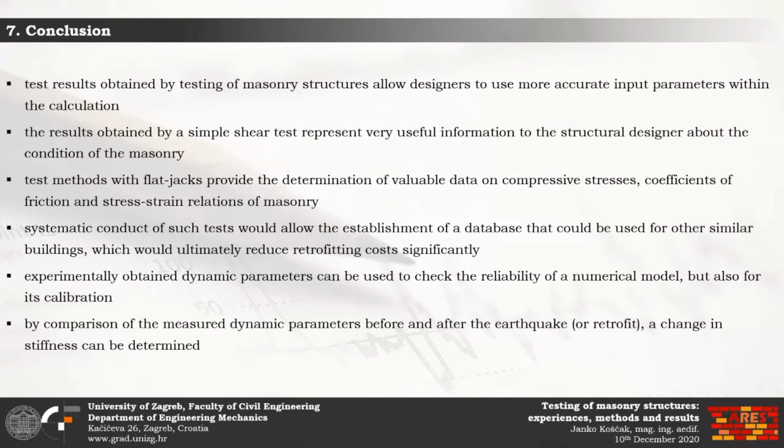Further, the experimentally obtained dynamic parameters can be used to check the reliability of a numerical model, but also for its calibration. Lastly, by comparison of measured dynamic parameters before and after the earthquake, or before and after the retrofit, a change in stiffness can be determined. We actually measured one building in Zagreb before and after the earthquake, and for the same mode shapes, the frequencies were changed, reduced. Okay, so that would be all.

Thank you all for your attention.

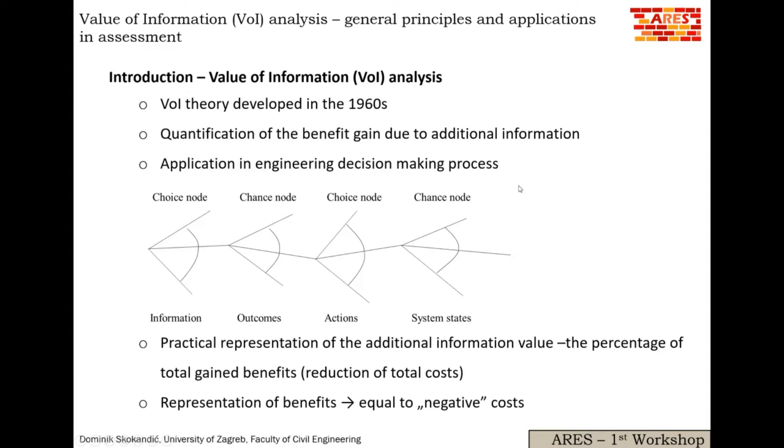There are certain parameters which are required, I will get to these in the end. I will now show you how beautiful and great that can be, but then we will come to the parameters, because the value of information theory is based on a Bayesian approach to probability, so it can be really biased.

So the final outcome is strongly dependent on the input information. In structural engineering, and in all aspects of engineering, we are dealing with large structures, and the costs of operation, maintenance, and potential failure or closures of those structures are enormous.

We have a lot of alternating outcomes. For example, if we want to use various structural health monitoring methods, we can estimate an outcome based on the SHM we are using.

In order to do that, a very convenient graphical method is called the decision tree. It basically looks like this, but this is only for two outcomes, so it can have as many branches as there are SHM methods you want to quantify.

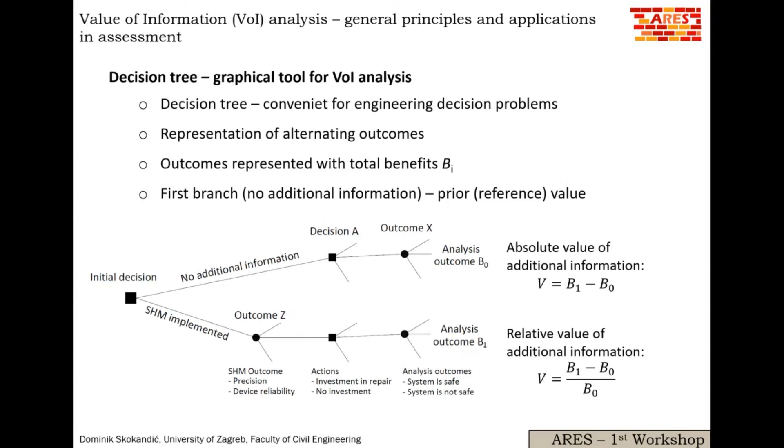Unfortunately, we don't have time for more. I know it sounds rather complicated, but there are many simple examples which can be used to present this more graphically, and hopefully more of you would understand what I'm trying to explain. So that's all for me.